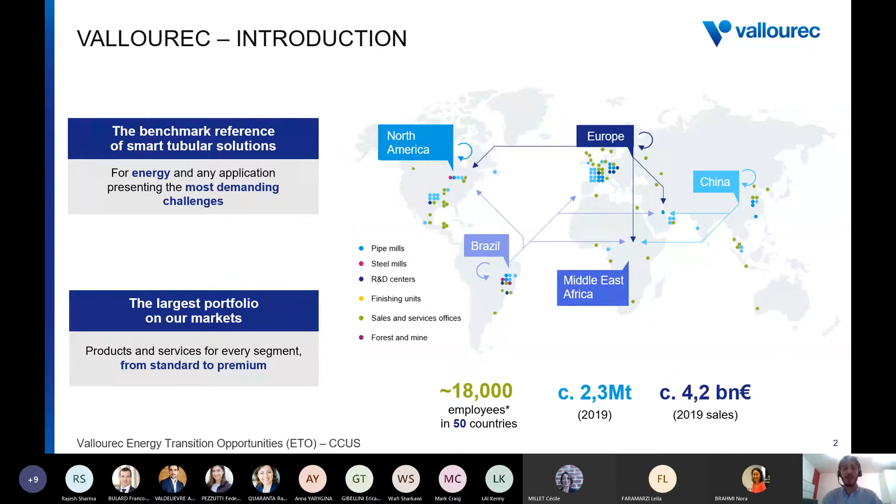We are present and doing activities in about 50 countries with almost 18,000 employees and about 4.2 billion euros of revenues in 2019. This balanced presence in the main four regions for Vallourec provides us with the global reach as well as the local presence that could help us to support our customers locally where they need us. A little bit about what segments and activities we are involved in.

So obviously the energy industry and oil and gas, both upstream and downstream, are the main focus of the company. We provide premium tubular solutions and connections, what we call OCTG. So maybe keep this keyword in mind. This is oil country tubular goods, the casing and tubing that we use within the production wells, as well as pipes for the pipelines for transportation of the fluids. And in the downstream sector, we provide tubular solutions for the refineries, petrochemicals, gas processing, etc.

Another industry that we are active in is industrial applications, where we provide seamless hollow sections, tubes, and hollow bars for applications such as mechanical engineering, automotive, and construction industries. So here it's mostly about the mechanical properties of our solutions, which stand out.

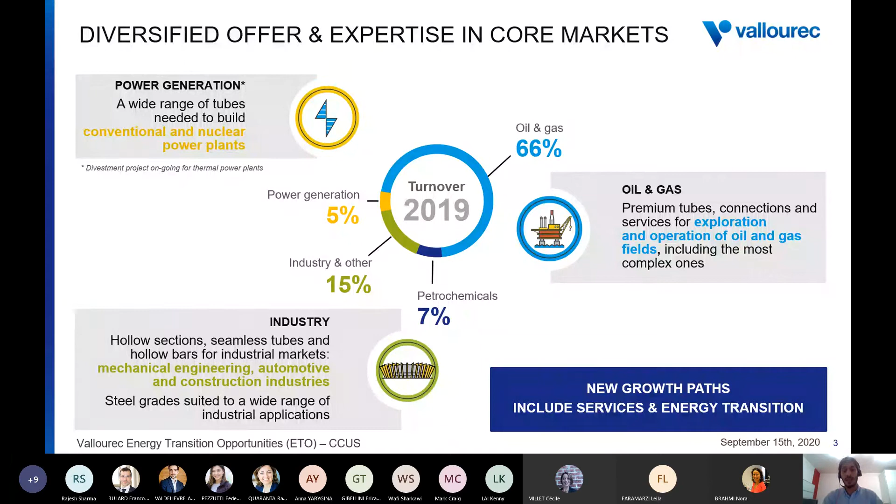And last but not least, the group has been active for decades in the power generation industry, conventional power plants and nuclear power plants. But the group has decided recently to divest these activities and in their place focus on energy transition and low carbon solutions. With that, I enter the energy transition organization of Vallourec.

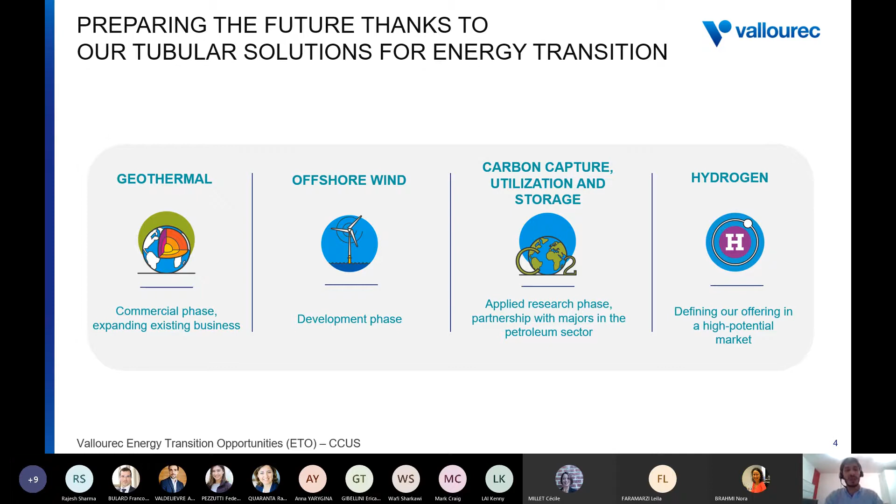Within the group, we have 5 low carbon solutions. Here you see 4 of them because these 4 are included within the energy transition organization. The other one, solar photovoltaic, is in another department. So I will focus on these 4. We provide tubular solutions for geothermal activities, offshore wind, hydrogen, as well as carbon capture, utilization, and storage. Maybe just to introduce the CCUS cluster within Vallourec, I will play you a very short video. It's a good introduction, so we can go further after.

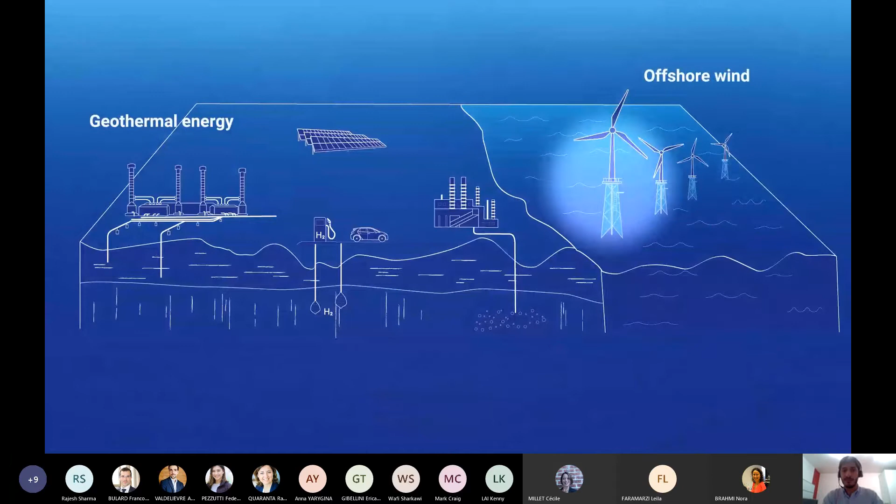Ali, there is no sound on the video. Sorry? There is no sound. Sound is off. Okay, I think there should be. Okay, yeah, I think I know what the issue is. Sorry, I have to cut and then share the slide again. And there we go. Sorry for that, I forgot to include the sound of the computer.

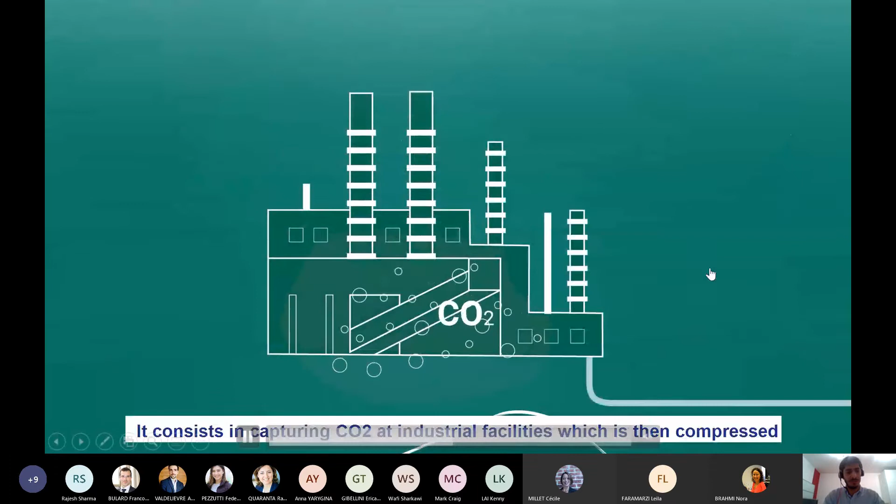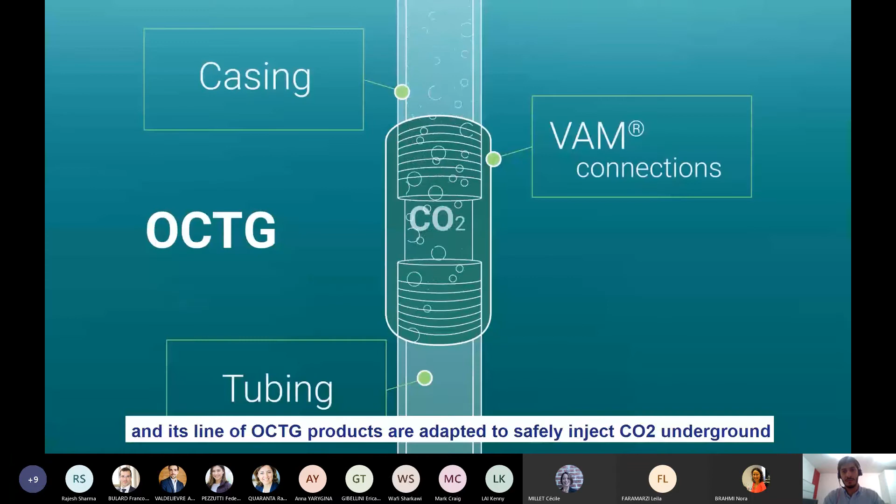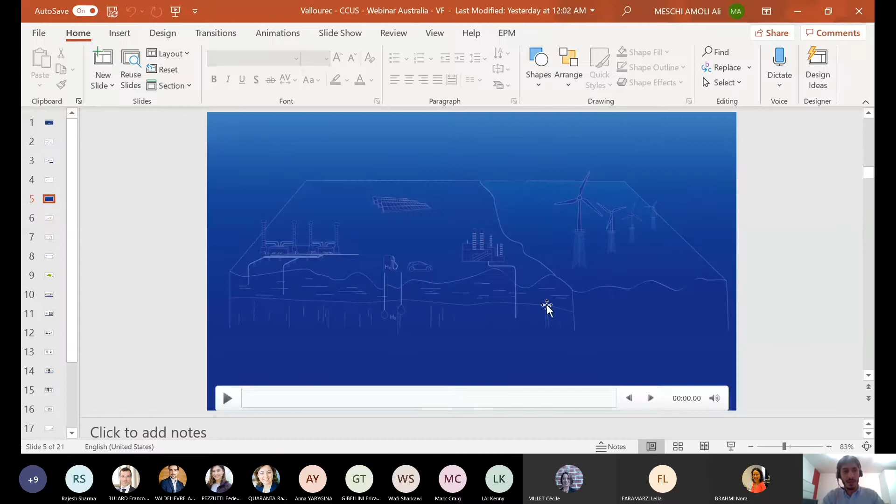Okay, so this was a good introduction to the CCUS activities within Vallourec. Now I'd like to give a little bit of information about our track records and project references within the world of CCUS and CO2 related projects. We have in Vallourec plenty of knowledge and expertise when it comes to CO2, and we have delivered solutions and supplied projects dealing with CO2 in the past and very recently.

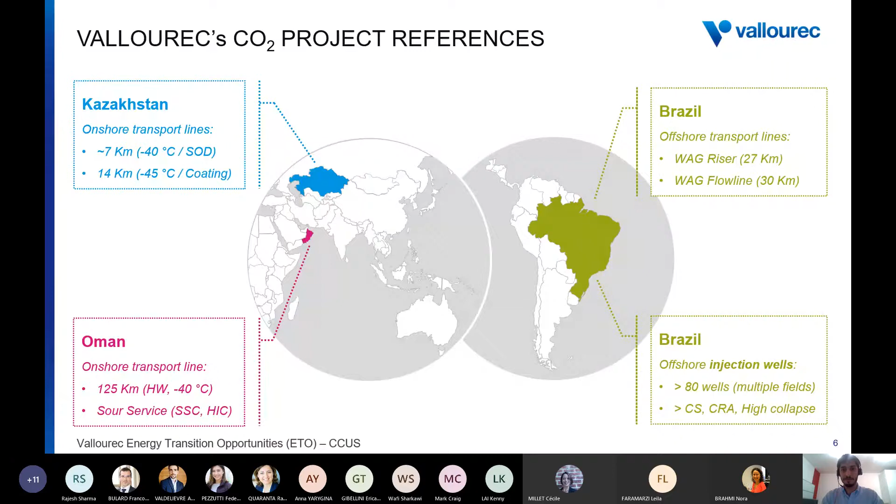Australia and energy transition. So where does Australia stand to address the global challenge of reducing emissions? There are obviously 3 key elements today when we're talking about reducing emissions. One is energy affordability. The other one is energy reliability in a world post-pandemic. I think these 3 are very important and key. And Australia has been trying to address these elements, prioritizing investment in emerging and low emission technologies.

As you probably know, very recently the government has published a low emission technology statement where they clearly emphasize 5 areas of activities: clean hydrogen, electricity storage, low emission steel, aluminum production, soil carbon sequestration, and finally CCUS. But why is CCUS so important in Australia and could have a lot of potential?

So to talk about that, I used a set of data published by CSIRO, the research institute in Australia, which is very interesting and very telling actually. So we see 3 segments with considerable export value and volume: coking coal, thermal coal, natural gas. And the size of the bubble shows the CO2 emission per export type. We can see these activities, which are quite important for the economy as well, have quite a big carbon footprint.

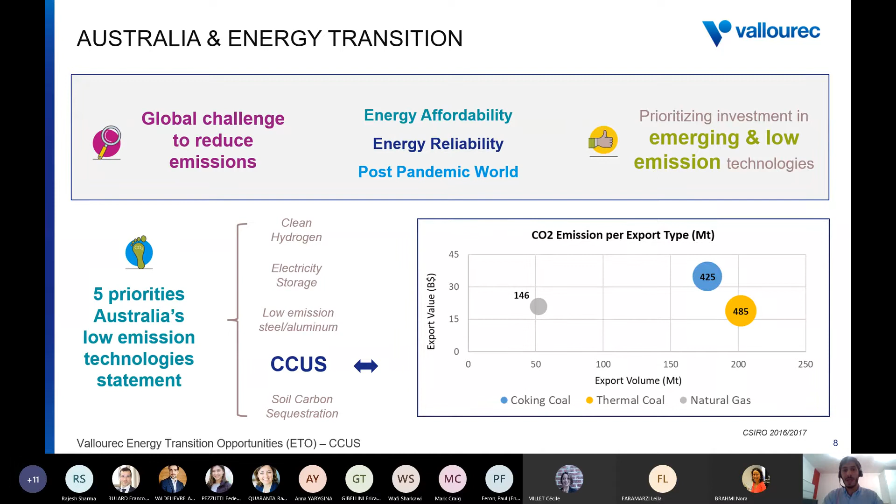So there is obviously momentum building up. We're seeing more and more activities, and given the recent announcement that the policy could also be more favorable, if we could have a proper development of infrastructure, either for transportation or for storage, Australia could have a significant potential.

To enter the subject of how we can actually bring about this infrastructure and scale it up to make sure that we can reach the aim of decarbonization at scale, first we have to have a proper understanding of the CO2 value chain. The CO2 value chain is quite extensive with different steps. I'm not going to go through all the details, but in a few words, we have source characterization. What are the priorities to be decarbonized?

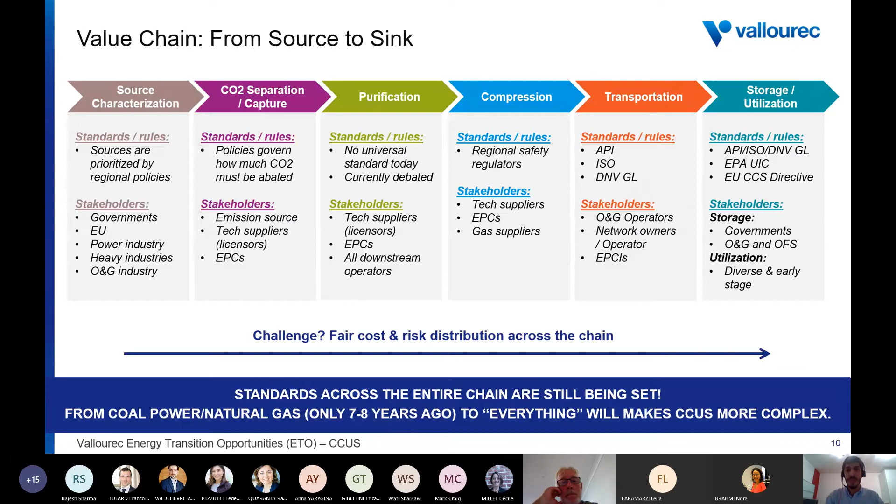So that's why today we're actually discussing more about transport and storage, because in the past couple of years there has been quite a lot of research and discussion around carbon capture, the technology, the viability of the technology. And because transport and storage come at the end, less attention has been paid to them. So we think that there are fair risks and knowledge gaps in these two segments, and we would like to bring attention to some of them.

But what are the risks and knowledge gaps in transport of CO2? First of all, as I said, the source really matters. Are we talking about CO2 from biomass, power, cement, etc.? Because each of them has its own CO2 impurity signature. Do we have water content in the CO2 stream? What kind of impurities do we have? To what level do we have these impurities?

Because some of these impurities, such as NOx, SOx, oxygen, do not exist in the oil and gas environment, and the oil and gas return of experience dealing with them is very, very poor. And they can undergo cross chemical reactions, creating sour or acid environments, bringing about corrosion and crack propagation, etc. These types of risks challenge the safe transportation that we want to have.

Another point is that the CO2 phase diagram is very sensitive to impurities. We transport CO2 in dense phase, supercritical, so it's very important to keep it in single-phase flow within the transportation step. The impurities could bring pressure drop within transportation, and that will cause a two-phase flow, which is not wanted. And obviously, a significant pressure drop could bring a very, very low temperature environment, and that's another risk in CO2 transportation. And in the worst case scenario, this will

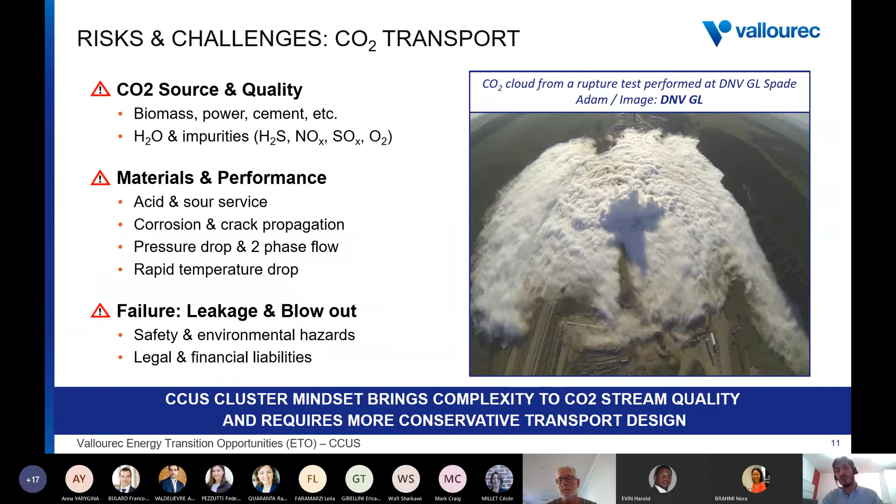And when dealing with the cluster mindset that I said, the diversity of CO2, it's very important to make sure that there is a conservative design of the transportation, dealing with all those CO2 impurities from different sites over time, to make sure that there is a safe transportation. Well, how do we try to address in Vallourec some of these risks?

In Vallourec, we provide the seamless products for onshore and offshore piping systems for transportation, and the accessories associated with those pipes. We have a large portfolio of materials from carbon steel and corrosion-resistant alloy to deal with those corrosion risks through lined pipes. And we do have a very comprehensive set of coatings, such as a thermal insulation coating for flow assurance. We have the internal, external anti-corrosion coatings.

But on top of that, the key point is that we have a set of experts in material selection that could provide the recommendation of what is the best set of materials to deal with your risks, low temperature or corrosion, with the element of cost in mind, to bring the most optimum material selection for that environment.

We also provide the advanced welding solutions through our affiliate Serimax for onshore and offshore welding, as well as digital solutions for efficient welding or handling of the pipes in the transportation segment for CO2.

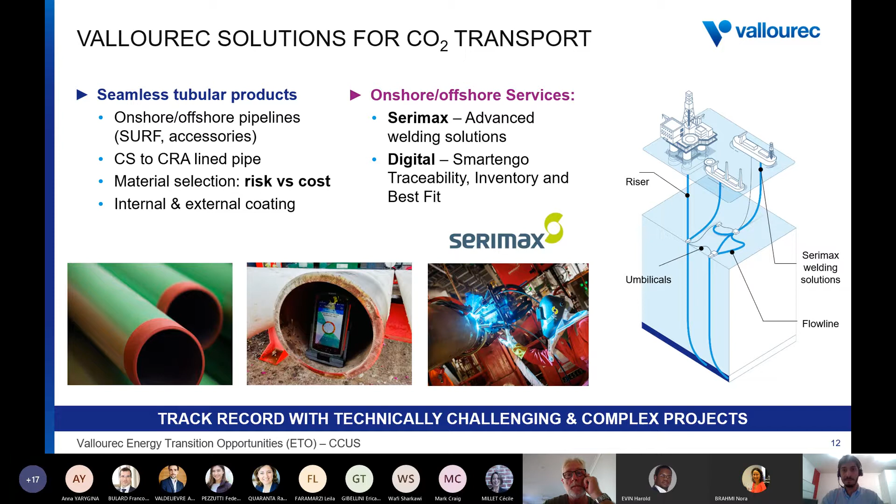Now, looking at the storage, what are the risks in the storage environment? First of all, we talked about that everything that happens in the value chain will impact the other steps down the value chain. So obviously that CO2 stream, with the impurities that it has, with the risks that it has, comes to the storage side. So we are dealing still with the same risks of corrosion, impurities, etc. But in the storage, we're adding some other variables, creating a more complex environment.

So not only are we dealing with a CO2 stream: does it have water or not? Does it have impurities such as H2S, NOx, SOx, and oxygen? We also have to look at what is the storage environment. Are we injecting into a saline aquifer saturated with water, or are we injecting in the depleted oil and gas reservoir? What is the reservoir condition itself? Does it have water itself, chloride, the pH situation, the acidity there? Because all this together could create, in presence of water, corrosion risks.

But also in injection scenario, we have what we call shut-in, where we stop operation for variable reasons actually. It could be long, it could be short. Where we have a pressure drop leading to low temperature environments from -10, sometimes to -30, and the worst case scenario in terms of blowout, it could go down to -60, -80 even.

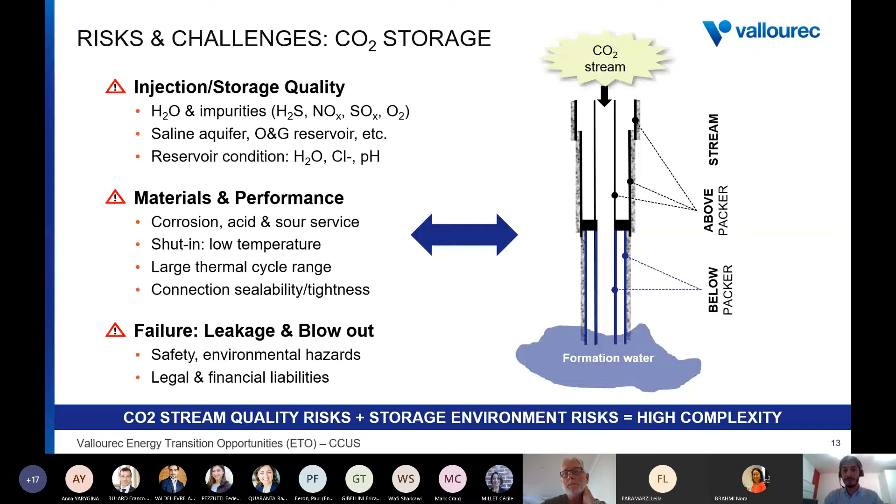And again, what do we do in Vallourec to address some of these risks? We do provide, as you can see on the picture, the casing, tubing, and accessories for injection of CO2 underground. We do provide premium state-of-the-art VAM connections, the best-in-class VAM connections, which will guarantee sealability to avoid leakage. We have a comprehensive portfolio from carbon steel to corrosion-resistant alloys to deal with the corrosion risks.

And again, we have a group of experts in Vallourec in our research facilities who will recommend the best materials for that specific environment, to address the risks, but again, keeping the cost in mind to make sure there is an optimum material selection in place.

We have our VAM Field Services for the field operations, tubular management services for handling of the pipe, as well as digital solutions such as Running Expert that provides, for example, the elements of digital twin for the operators.

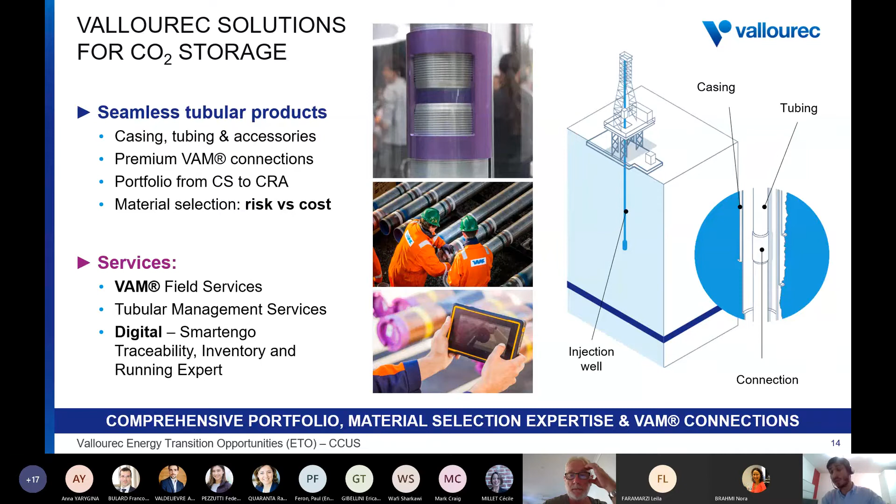I should also mention that when I talk, for example, about the qualification of the connections and the fact that this is a big risk, today we are working with some of the biggest energy companies in the world to define protocols and test procedures to qualify the connections, Vallourec connections for CCUS. And the preliminary results are showing that our connections perform properly under very low temperatures and do not pose a risk to CCUS operations.

This slide, I just like to give some insights about when we say corrosion in a storage environment due to water, what does it mean and how it looks like. So the first picture on the left shows the CO2 injection. So we have a simplified scheme of an injection well. We have the tubing, we have the casing, which is cemented.

So if you can see here, this is the casing cemented. This is the tubing where you have the CO2 injected in dense phase to the formation. We have the packer here separating the reservoir from the upper parts. So during the injection phase, we don't have risk of corrosion. Risk of corrosion actually happens when you do the shut-in, short-term or long-term.

Shut-in, so you do 20 years of injection, a couple of times during the year you stop your operation for some reasons, and I don't go into the details. And then due to this pressure drop, because you're stopping the operation, you have a gas phase of CO2 on the top part of your well, and then you get a wet CO2 due to contact with water, formation water, on the bottom hole.

So the risk of corrosion happens if your CO2 itself has water, what we call wet CO2. If your CO2 stream itself has water, the risk of corrosion happens here, as well as in the interface between the tubing and the casing with the formation.

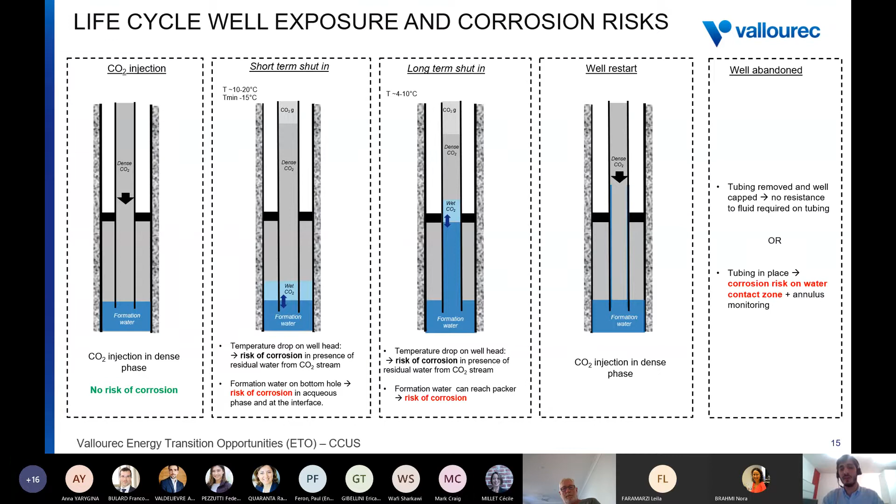How do we do material selection? We have expert teams in place to help the clients with the cost versus risk element in the material selection. So this is, let's say, a decision tree. So you have the simplified well again, the casing, tubing below and above the packer, and then your CO2 stream.

So if your CO2 does not contain water, or if there is no water in the environment, we don't have risk of corrosion. It's very negligible. We can use carbon steel for the casing and tubing. So that's a simple procedure. But the risk starts when you have presence of water, either saline aquifer or formation water.

Here you have three different scenarios. If you do not have any impurities in your CO2 stream, or you only have H2S, so sour environment, this is, so we can say, classic oil and gas environment. So based on the temperature, chloride, acidity, or the partial pressure of the H2S, we will do.

So as I said, this is a classic oil and gas environment, and there we have in Vallourec an extensive return of experience from our production wells. We have a lot of tests on materials and plenty of data to be able to do the perfect material selection for that environment. The knowledge gap starts where you get impurities in your CO2.

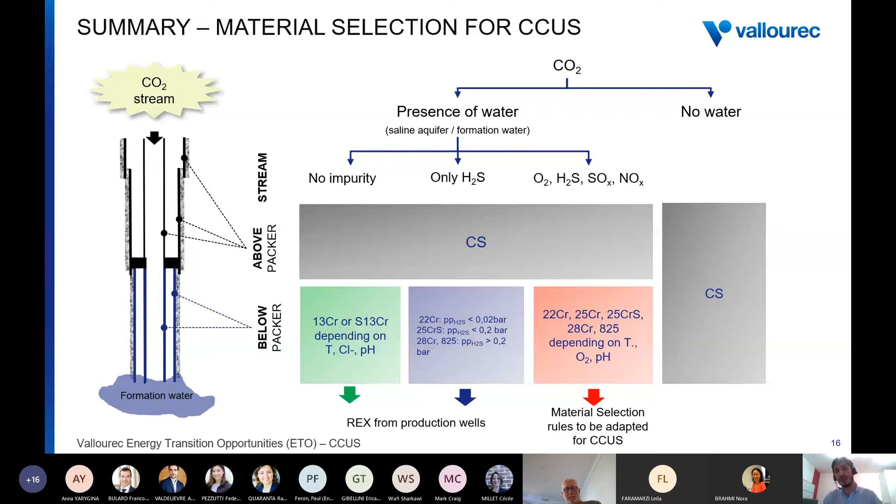And how in Vallourec we try to bridge this gap is through our R&D activities and collaborations with energy companies around the world. We do have a powerful R&D asset within Vallourec. We have 6 advanced research centers in Vallourec around the world, in Asia, in North America, South America, and of course in Europe, in France and Germany. We have more than 500 researchers and technicians looking at R&D activities.

We have fruitful partnerships with the universities in Europe, in US, and in Brazil, which provides us also with an additional set of expertise that helps us to focus on the CCUS knowledge gaps that I mentioned, to bridge those gaps and address the risks. In recent years, we had plenty on CCUS and CO2 environment. For example, through one project with the French National Research Agency, we looked at how metallic material degrades in CO2 storage wells. And we published a scientific paper on this topic.

Also, in recent years, we have been involved in 2 joint industry programs with Total, Equinor, Shell, and the research lab IFE in Norway, looking at guidelines of material selection for CO2 storage wells in presence of impurities. That box that I mentioned earlier, how to address that knowledge gap in presence of water impurities. And also, what is the safe operational window for CO2 transportation in carbon steel pipes with those energy companies. So we are working significantly inside Vallourec and with partners outside to address those risks.

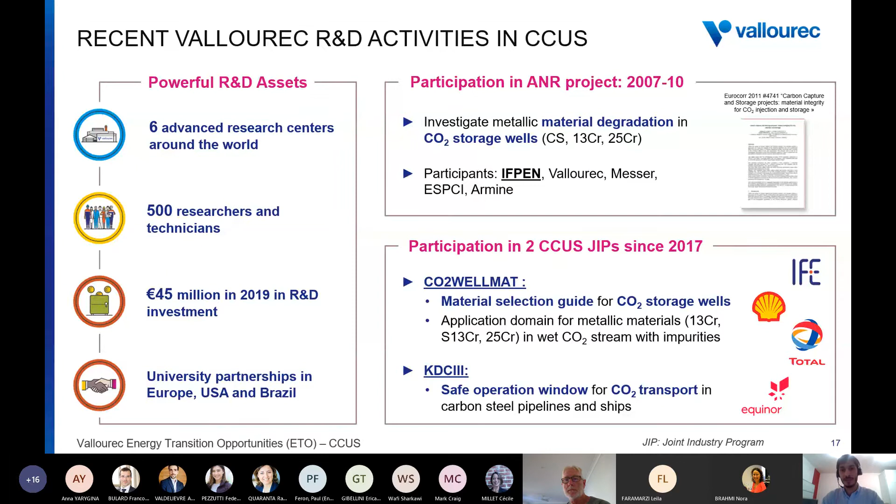I'd like to give a concrete example of how we do material selection when I say risk versus cost and bring value to the customers. This is a case study that we have done for a project with a very major energy company in the Middle East, where we were dealing with an offshore environment, a very, very extreme sour well due to very high content of H2S. So on the graph, just to explain simply, the project characteristic is the yellow star, in terms of the level of H2S and the temperature, and those colored lines are the materials that could be used in different environments.

So obviously you can see that the project conditions would have normally required the operator to go for the material called G3. It's a nickel-based material, very expensive, an advanced one. But what our experts in Vallourec brought to the table was that we proposed a set of test protocols for the corrosion to prove to the customer that they can go for a material that is less noble, less advanced than the G3, but will do the job and will not compromise the risks, with a significant cost reduction.

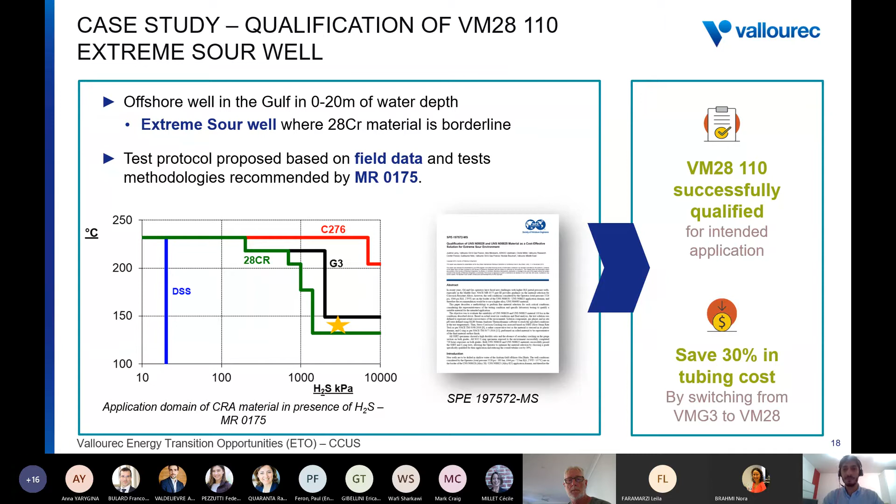Monitoring. I'd like to speak a little bit also about monitoring because it's a very, very important phase in CO2 storage, especially after injection. Yes.

You can spend 5 more minutes. You've come almost to the end. I think I've got 2 slides actually. Sure. Yeah. Great. Thanks.

So the monitoring, and the risks associated with monitoring. It's very important to anticipate and avoid leakage in the well during the process. Why is that? Because the CO2 should not be leaked and then should not migrate to shallow formations where it could bring contamination to underground water, soil, or air, because you have fractures, you have faults that could, if you do not have a proper well design and you're not monitoring properly, bring the migration and then contamination, obviously the hazards to the environment and health of people around that site.

We have also the operational risk. The well integrity could be compromised, and risk of corrosion to those parts of the well that are not supposed to be in exposure to CO2. And in the worst case scenario, you can have your operation stopped, which again will bring you to the contractual failure and financial penalties that you could face.

We have therefore developed an innovative solution in Vallourec for monitoring of this operation called Intelligent Pipe. Intelligent Pipe is generally an application developed for the exploration and production segment within Vallourec, but we have been adapting it for the energy transition, and we believe that it could provide a lot of value, such as real-time monitoring of the entire wellbore, anticipating the abnormality to avoid failure, and therefore ensuring safe injection and storage.

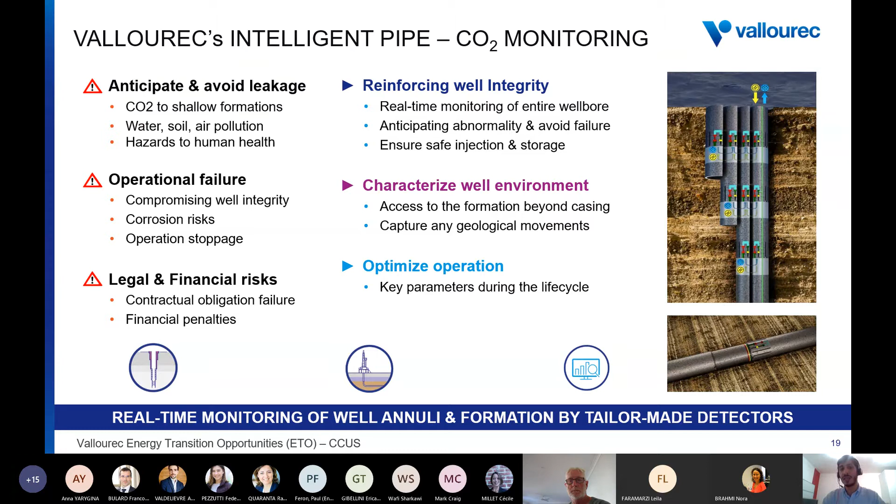We can also characterize the well environment, for example capturing any geological movements or access to information on the formation beyond the casing. And obviously with years of data that it provides to you, with this data pool, you can actually optimize your operation over time as well. So monitoring is key, and we have this very innovative solution in Vallourec to address the risks related to that.

And with that, I'd like to conclude my presentation: CCUS in general is a very important topic, and there are a lot of risks when we talk about transportation and storage infrastructure. But in Vallourec, we do have the products that are resilient to CO2, and we have the services that are adapted to this environment. Material selection is, if not the most important topic in CCUS transport and storage, one of the most important elements to mitigate the risks. In Vallourec, we do have good knowledge on material selection for existing applications such as oil and gas production wells and transportation, but we are adapting this material selection approach to CO2 based on the impurities that bring the complexity.

When it comes to the connections, we have a comprehensive portfolio. We're working with energy companies right now to qualify those connections because we are involved in some projects, for example, in Europe on CCUS, and we have the support experts to adapt these connections for CCUS, and plenty of collaborations right now with external companies and energy majors to make sure that we can qualify and bring about the right materials and the right connections for the infrastructure development at scale.

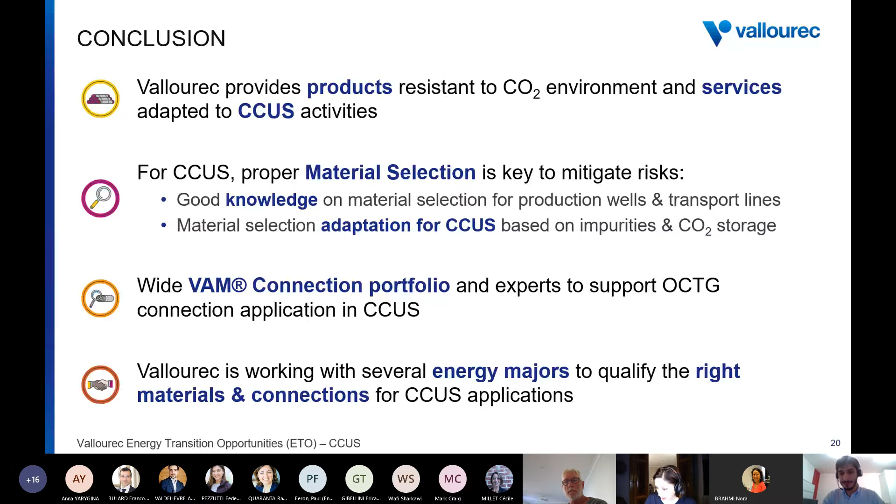There are a couple of questions. The first one: with the extensive track record of CO2 EOR, enhanced oil recovery, mainly in the US, what are the main knowledge gaps in transport or storage of CO2? If you could elaborate. Yeah, sure.

This is actually an interesting point because we sometimes get this myth that because there has been transportation of CO2 for decades in the US or other areas, and we've been doing CO2 EOR for many years, why do we say there's risk? First of all, CO2 EOR, enhanced oil recovery, does not contain those impurities that I mentioned. Mostly the CO2 was coming from gas processing facilities or other sources that maybe contain H2S. They do deal with H2S, but they do not have that nitrogen dioxide or oxygen. So that risk of impurities that we're talking about doesn't exist.

Another point about CO2 EOR is that when it comes to the injection, you are injecting into the reservoir and then you produce. So the CO2 is not in permanent contact with your material and your formation water, for example. We're talking about 20 years of injection in CCS and then 100 years of storage. So after the injection period, your CO2 is there for 100 years in contact with water and other elements, with your material. So the risk of corrosion is much, much more significant.